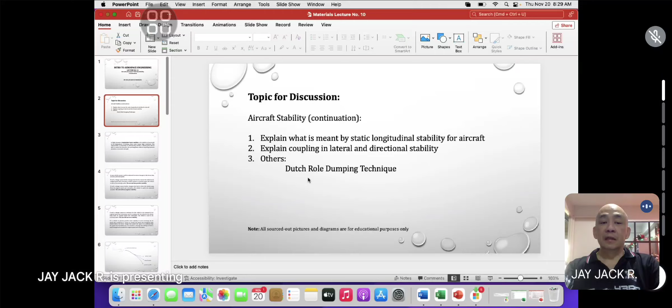So again, as I've said, this is what we are focusing on, longitudinal static stability, is the ability of an aircraft in the longitudinal or pitching axis. So this is the airplane, okay? So this is the movement of your longitudinal axis. It plays on the lateral axis, okay? So it moves like this, okay? So that's pitching, pitch up, pitch down, okay?

So that is under steady flight. This characteristic is important in determining whether a human pilot, no? Like we have artificial intelligence pilots now. Whether a human pilot will be able to control the aircraft in the pitching plane without requiring excessive attention or excessive strength. Now, look at the stealth aircraft that use artificial AI.

So they are acting as the pilot itself, highly electronic, meaning there is no need for human intervention. That's why my definition includes human pilot, because later on, a time will come when there will be no human pilot. All will be circuits, ICs, and so on and so forth. No humans will be seen there.

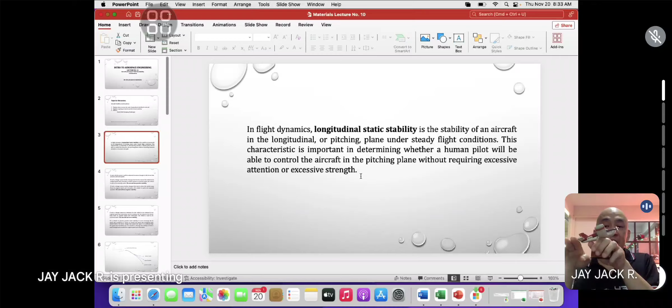Because what it needs to maintain is the performance for sudden pitch down and sudden pitch up. It dives, then when it goes down it needs to climb back up immediately. And that is based on the maneuverability. And of course, if you can maneuver, you need to be able to control it.

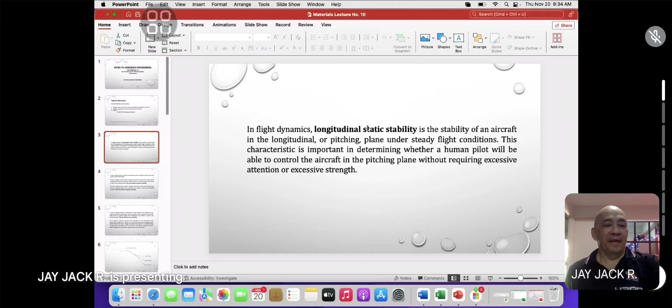So, okay, any vehicle moves, it will be subjected to minor changes in the forces that act on it and its speed. If such a change causes further change that tends to restore the vehicle to its original speed and orientation without human or machine input, the vehicle is said to be statically stable. So that is what you call aircraft positive stability.

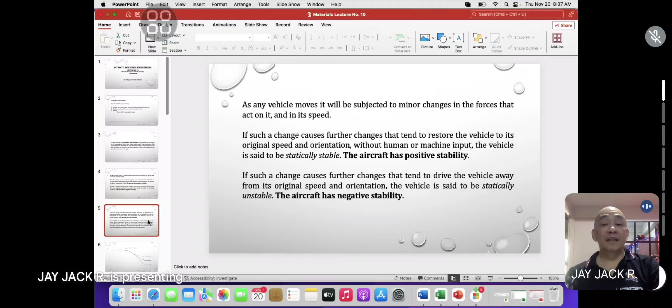If such change causes no tendency for the vehicle to be restored to its original speed and orientation—orientation here illustrates the original position of the aircraft, where the airplane is supposed to be—and there is no tendency for the vehicle to be driven away from its original speed and orientation, the vehicle is said to be neutrally stable. The aircraft has zero stability.

For a vehicle to possess positive static stability, it is not necessary for its speed and orientation to return to exactly the speed and orientation that existed before the minor change that caused the upset. It is sufficient that the speed and orientation do not continue to diverge—meaning you can change or alter, but at least there is a small change back towards the original speed and orientation.

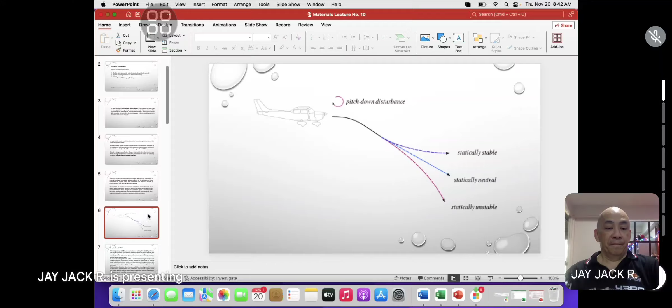Okay, longitudinal stability of an aircraft, also called pitch stability, refers to the aircraft's stability on its plane of symmetry about the lateral axis. So that is what we call longitudinal stability.

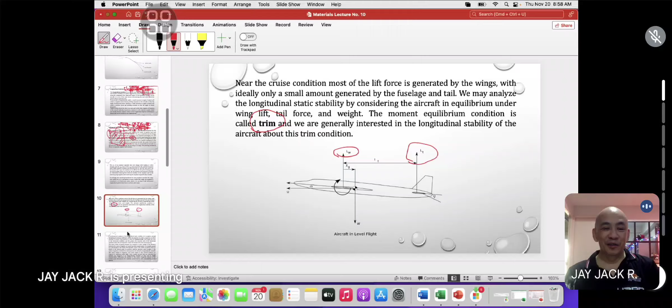So yung iba, pagka ganun, pag akyat ganun, okay na umakyat. Pag bato, umakyat, kaya lang pagbawi niya, diretso na sa lupa. Dapat yung pagbawi niya, akyat ulit siya. Meron ganun eh, na pagka pinalipad mo, meron pa ngang gumagano, bumabalik - meron bumabalik, no? So yun yung matindi. Then we have the neutral point, okay?

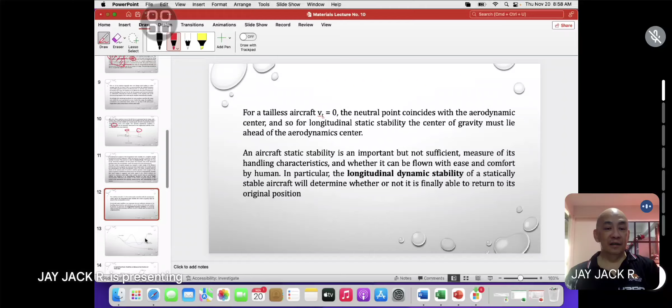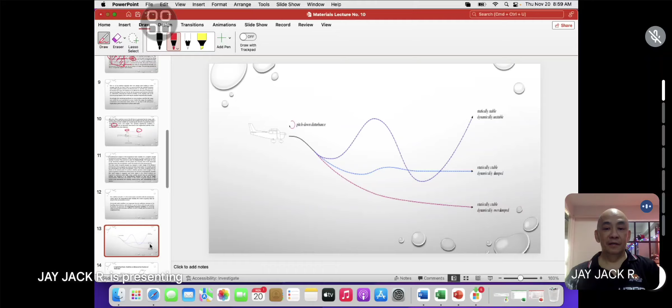So we have the longitudinal dynamic stability, this is the pitching, no? So we have this one - this is statically stable. We have neutral, then we have unstable, statically unstable. Then, of course, this is another one - longitudinal static stability influenced by the position of the thrust line.

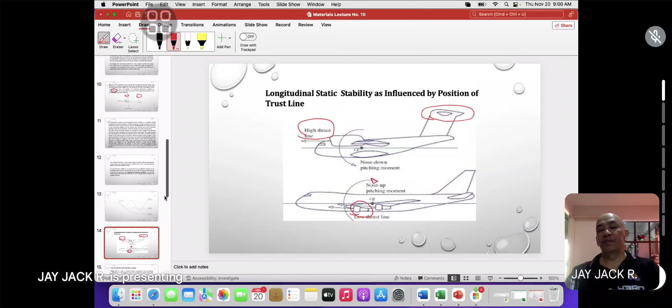Then we have the Dutch roll, no? Ipapakita ko na rin yung Dutch roll sa inyo. Dutch roll is a type of aircraft motion consisting of an out-of-phase combination of tail wagging and rocking from side to side. That is directional stability - lateral and directional stability, so ito yan.

Lumilipad ka ngayon, then nag-yaw ka rito. May kita mo, kung titignan mo, itong surface na to, nawala di ba - ay hindi nawala, lumiit di ba, ito lumapad. So pag nag-yaw ka rito o directional mo dito, lumapad to, the tendency nito is to produce much higher lift, right? So pag nag-yaw ka, pagka gumanon ka, magyoyo yan. Pagka dineflect mo rito, the tendency is yung buntot, will go here and this will be exposed - ito tumago. Since exposed ito, what will happen? This will produce higher lift than this one. So pag umarap ka rito, at the same time, nag-roll - that is the directional stability.

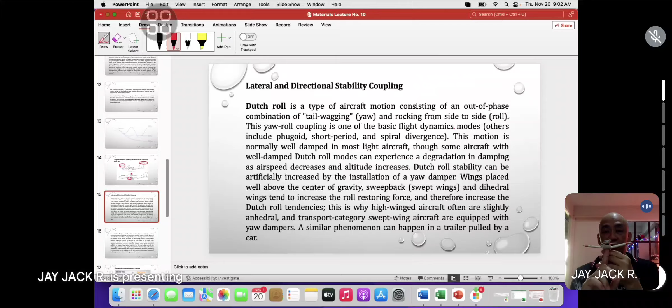And of course we have the lateral stability. By lateral, yan o, umakyat - okay, directional stability. Then nagkaroon ka ng lift, umakyat siya, bumaba yung kaliwa, no - and that is your lateral stability. Lateral meaning you're rotating sa longitudinal axis. Yung directional, nag-ro-rotate ka sa vertical axis. So again, pag ganun mo, na-expose yung kanan, nag-produce ng lift, so magro-roll yung aircraft, and that is why we produce swept back.

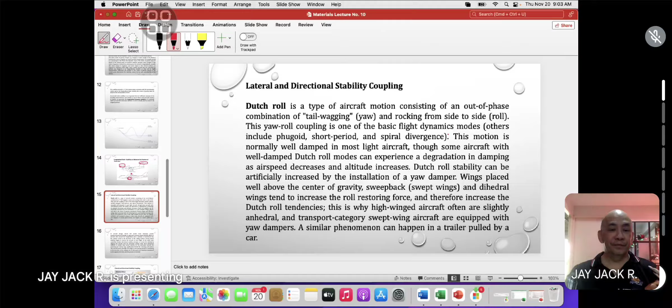So balik na naman tayo - swept back yung naka-atras yung pakpak, to counteract the possibility of a Dutch roll. Tawag pala rin Dutch roll. So pag ano niya, nagda-Dutch roll siya. May example nito. In aircraft design, Dutch roll results from relatively weaker positive directional stability as opposed to positive lateral stability.

So yung issue nga rito, kita mo to, naka-perpendicular siya - i-atras mo yung pakpak, i-atras mo ng konti, kasi katulad dito, ang lakas dito. Kasi naka-perpendicular siya sa hangin, okay? O paano yan kung i-atras mo to? I-atras mo yan. So, kain-kain. The problem, pag inatras mo yan, the tendency, lalaglag naman yung lift mo. Pagka lumaglag yung lift mo, magsisink yung aircraft.

So usually pagka nag-swept back ka, swept back mo yung wing, nakaganon, malakas yung power mo. Kasi kung katulad dito, ganito kaliit lang yung aeroplano mo, tapos swept back mo to, pag nag-yaw siya, makikita mo, nagre-reduce siya ng altitude. Then magro-roll siya pababa. Okay, swept back.

Pagka mo sa kaliwa, not sufficiently pinoproduce ito, nakatras yung pakpak. What will happen? Bababa yan. Pero certain lift will be produced also to roll the aircraft, but it will not maintain its position or its orientation. Hindi siya mananatili sa orientation niya or sa position niya, bababa siya, because although there is a lift, there is a loss of lift, because of the configuration of the wing.

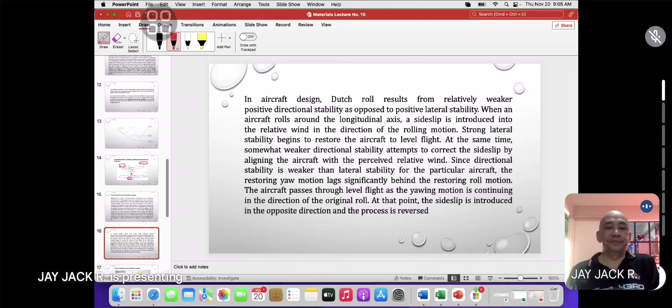So ito, we have now this one. Nose pull to the right, so we have more lift, more drag. So dihedral, okay? Dihedral effect. Dihedral, naka-atras. So ito yung dihedral natin. Kumanan siya, but of course the effect here is more drag. And because of this configuration, this will produce lift but a little bit, unlike ito na ang lapad, talagang naka-dikanto siya, naka-perpendicular siya.

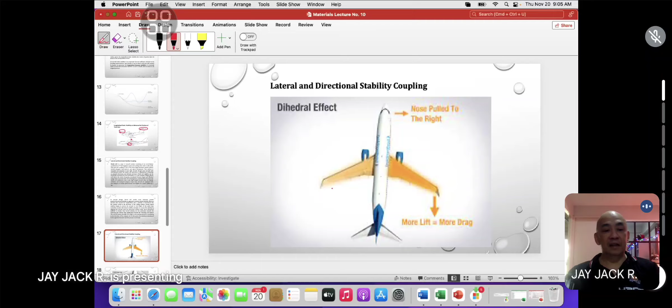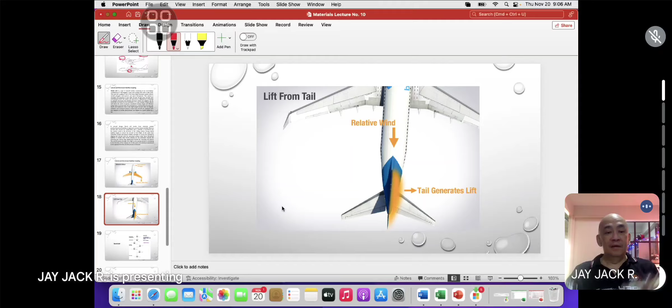So for that, it will be corrected by rudder. Ikino-correct mo na rudder, para pumihit siya pagkasan ba yung natin. Okay, ito yung Dutch roll. Kunyari, humarap ka rito, pagharap mo, so magro-roll ka rito. So pag na-roll ka, it should be corrected automatically by the rudder. Kasi hindi mo naman pwedeng gamitin to, kasi sabay yung pag ganon lang yan. It's either gumanon yung aircraft, gumanon. So ito pa rin yung lalaban din, yung rudder natin, para bumalik siya. So this is the Dutch roll.

So pag ganon yan, there is what you call damp. Dinadamp niya yung motion. So pag ganon yan, gumanon siya, umakyat, nag-roll. Sobrang roll yan. Nag-roll siya rito, then because of the rudder, binalik mo, the tendency, gumanon yan, then gumanon, then gumanon. Ibig sabihin, you have directional and lateral stability. And this aircraft will tend to roll. Now yung issue rito is that the airplane will damp the motion.

Kusa siya, kasi sa control surface may tatawag na trim tab. So kusa siya nagtitrim. Yung trim niya is para siyang para sa inertial load. Kapag pumunta rito, nagde-deflect siya sa opposite para ibalik agad. Yun yung trim, opposite direction. Although hindi masyado malapad, but of course it will lightly damp. So pag ganon yan, umakyat, so the tendency kumanong ka, but of course you have the rudder, ibabalik mo siya, then the tendency ganon na naman. So that is a Dutch roll.

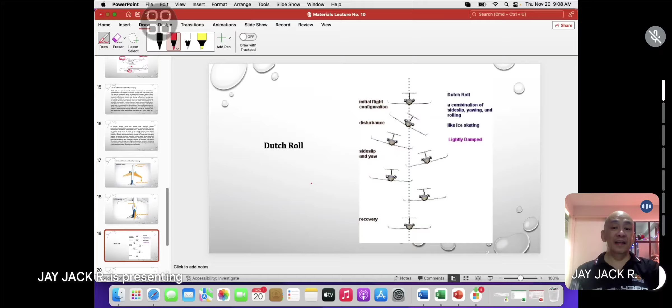Kaya kita niyo, pagka may ginagawa, sige mag-execute tayo ng Dutch roll. Pero pagka nag-Dutch roll ka, it should be high altitude. Huwag ka magda-Dutch roll na 500 feet. Okay lang kung jet, pero kung trainer airplane, wag. Umakyat ka muna ng altitude, at least 1,000 feet or more, then you execute a Dutch roll. Anyway, you will not have a Dutch roll sa baba, because once bumaba ka ng altitude, ibig sabihin lalanding ka na. Huwag ka na mag-maneuver pa, dire-diretso na yan, shoot na yan sa runway. So ito, that is a Dutch roll.

Okay, gumagalaw. Front view lang kasi, pero yung ano natin, ito, naka-swept back. Ganyan na siya. Losing altitude and the same, pero ito hindi to losing altitude kasi ang lapad niya. Galaw, ayos.

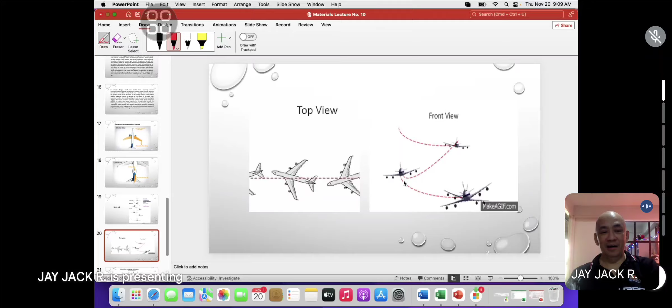Okay, we have the Dutch roll damping techniques. Ito ngayon, kusang dinadump ng ano, just to show you how it is being done for the airplane. Kusang nagdadump siya, pumipihit yung ano, ito. You can see, no, the rudder or the yoke is correcting the position of the airplane because of the Dutch roll. Nagkaon siya, kaya kung bibitawan mo, kusa siyang gumagalaw. Kung dito siya, gagalaw siya, papunta roon, without the intervention, kusang gagalaw. So ibig sabihin, the inherent performance based on the design of the aircraft, yun binibigay niya.

Okay, so dito using instrument. So if there are any other movement, makikita mo sa instrumentation niya, especially yung gyro. Gyro, yung sa horizontal. Artificial, ano ba daw, positioning.

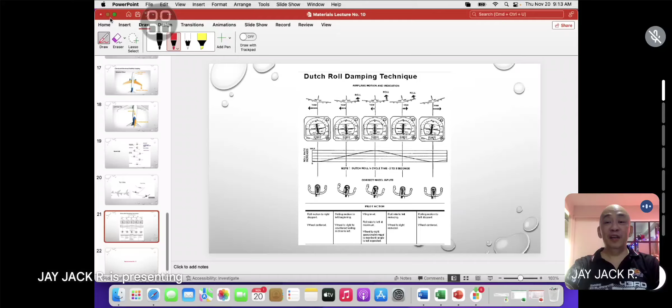Sa next meeting na tayo, puro malalaking aeroplano, passenger, kasi nakuha na natin sa small airplane, nakuha na natin yung basics niya. Then afterwards, hanggang sa finish line tayo, puro bigger airplane yung example na natin. Okay, so anyway, the bigger airplane will also react the same reaction, but of course, more sophisticated, kasi iba yung galawan ng malalaking eroplano kaysa sa maliliit.

So yun, and of course, you have to lifelong learning. Yung nakaraan, di ba, nagpalipad si Elon Musk ng rocket, so you check also that. Nabago na, grabe. Yung rocket noon, pag-lumipad yung rocket, nawawala, di ba? Ngayon yung rocket niya, nabalik, bumabalik, lumalanding pabalik, di ba?